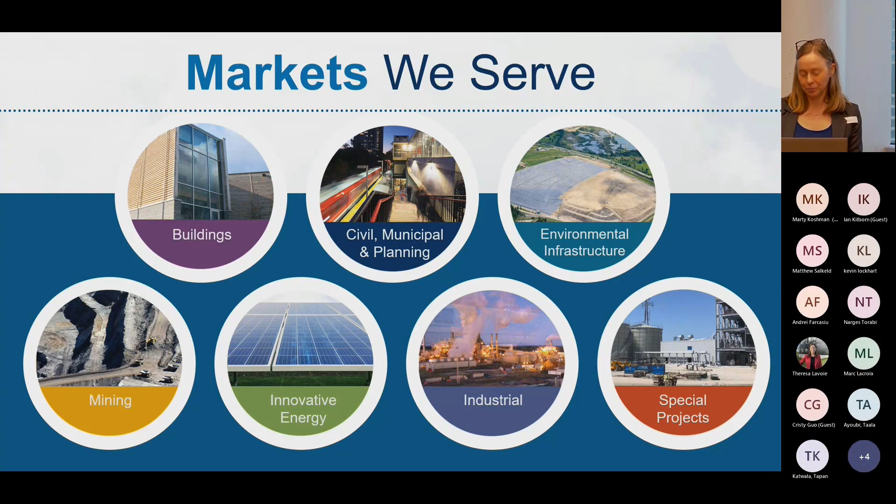We also think of ourselves in terms of the disciplines here at the company. There are 5 engineering disciplines: civil, electrical, mechanical, environmental, and structural, as well as planning and architecture. We can tackle basically any project that comes in our door, and we like to work on complicated multidisciplinary projects along the way.

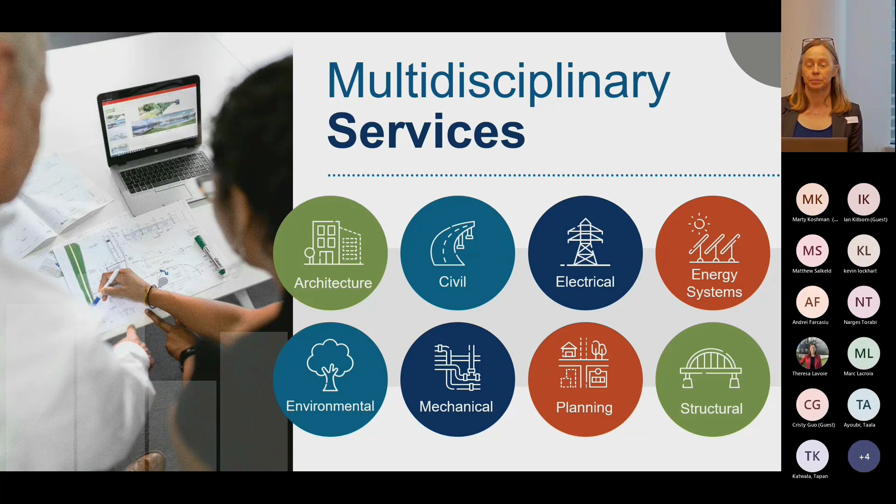We care very much about the planet that we live on, the environment, and the people that we work with. So we have a focus on Indigenous relationships, with long-standing interaction with a number of First Nations, supporting their buildings and infrastructure. Sustainability is important to the company and a growing part of our delivery model, and social responsibility has been a long-term part of the company.

So two slides here just to set the context. I think this isn't all that new to everybody here in the room. I'm so pleased, and thank you everyone for coming and joining in to help build this community of people that understand energy and carbon reductions and how we can all work together to get to where we're headed.

As you know, the history of the world is population growth and demand growth for energy, and that's typically seen a growth in GHGs over time—this is the highest line on the chart. Building codes, more efficient products, and even LEED-type building design standards have brought that curve down, but it's still been seeing an increase in GHG emissions over time.

But we know that we need to get to significant carbon reductions over time. There are different paths that can be taken from where we are to where we need to get to, and different targets down the road, marked by some of those X's. Our job today, in terms of energy and carbon in buildings, is to accelerate within the building sector, making sure there's a downward path so that by 2030 new buildings are primarily net zero carbon, and by 2050 the entire building stock has a very low carbon footprint.

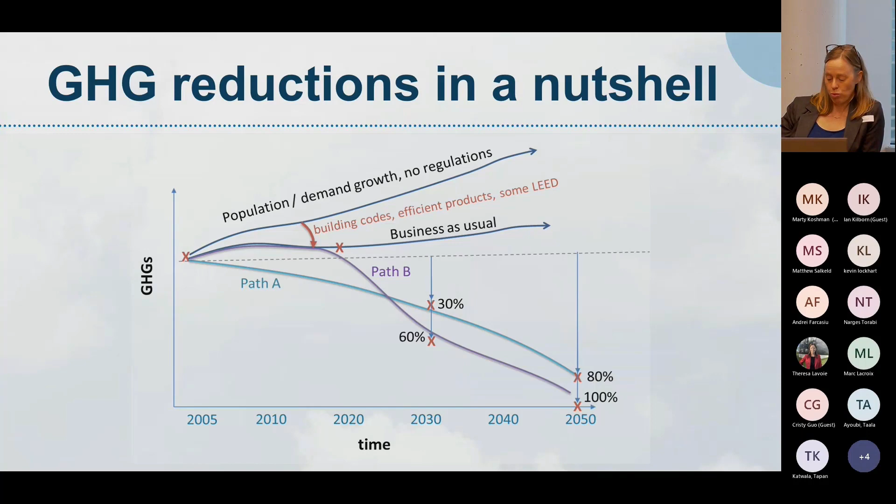I borrowed this from the City of Ottawa. Some of us on our team have had a long collaborative effort working with the city on the Energy Evolution Program, and we're pleased to see where they've come to. This is their analysis of where all the GHG savings and reductions need to occur within the City of Ottawa.

To hit net zero carbon by 2050. Our topic today is the bar along the bottom, the dark green of new buildings primarily. The building standard will primarily tackle that tranche of all the work we need to do. J.L. Richards works across most of these tranches, and our energy team is interacting with all of our disciplines and markets to work towards reducing carbon in all of those sectors.

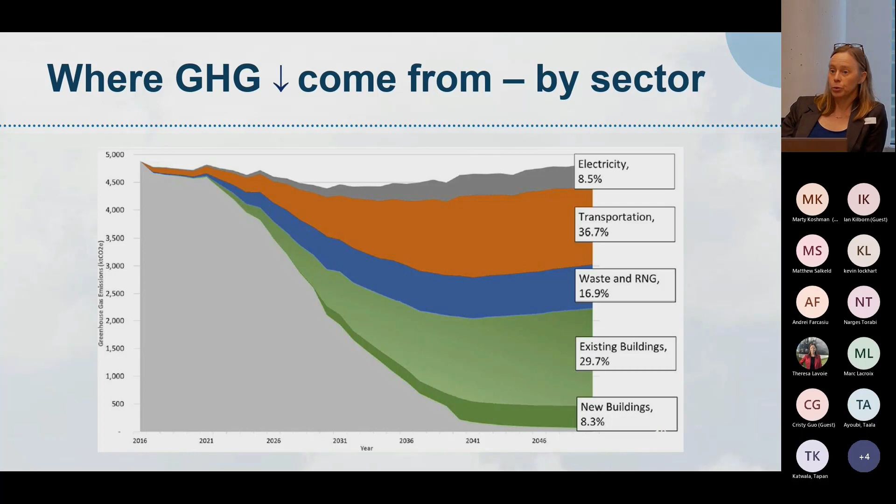But today's topic, as you know, is new buildings. So I'll leave it there, hopefully having set the stage for understanding what some of these design standards can do, how they work, and how they're driving us forward. Thank you so very much.

Okay, quick transition. So up on the screen here, I've got a few of the big name standards that I wanted to do a brief overview of today. I've grouped them into four main categories.

You have the model codes, which are national level codes referenced by many other codes or built off of. The regulatory codes are put in place by authorities having jurisdiction and are enforced through legislation or contract requirements, such as the City of Ottawa's new high performance development standard that's coming out. There are also design standards, which are more of the green building standards - voluntary standards typically pursued to showcase high performance buildings. And a little separate from all of that are the operating standards, which focus less on the design of a building and more on how a building is actually operating when it's up and running.

There are many other standards I could go on about. As I said, this could be a two-week seminar or conference, but I wanted to focus on these main ones today.

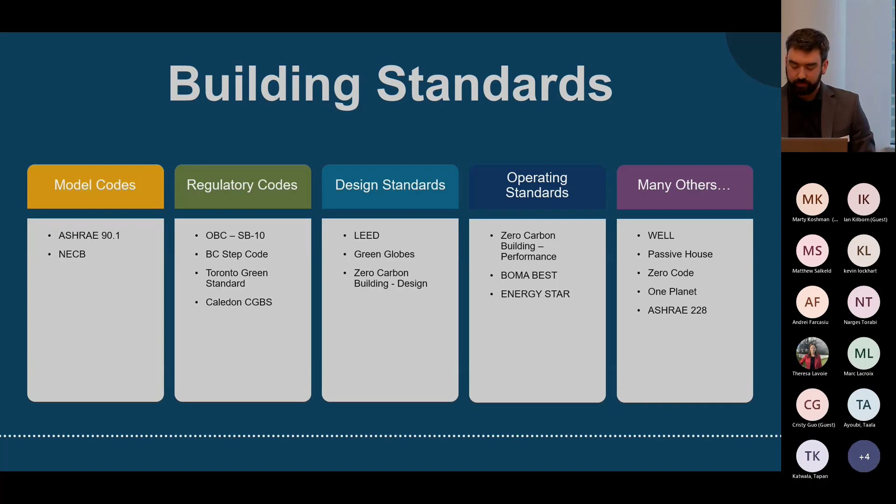So, the baseline reference models - these two are typically set to give a baseline that's compared against. NECB and ASHRAE 90.1 are often used for these baselines, and many funding programs and grants require their use as examples to build off of - for instance, you need to be 25% better than ASHRAE 90.1 or NECB.

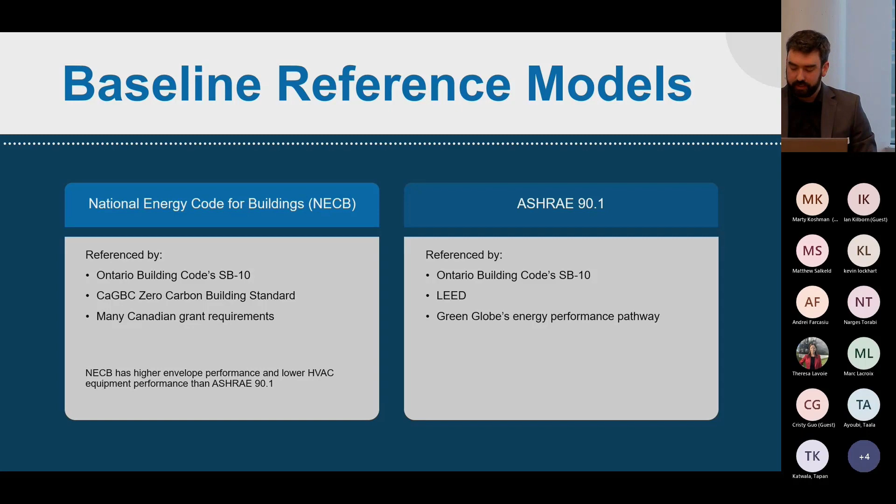ASHRAE 90.1 is probably the grandfather, or grandparent, of energy standards. It was probably the first comprehensive energy standard for commercial buildings, and it's commonly referenced by many other standards. This is the one that is most up to date and revised throughout the years. A lot of new standards will borrow aspects from ASHRAE 90.1, or just point to it directly when setting their own energy targets.

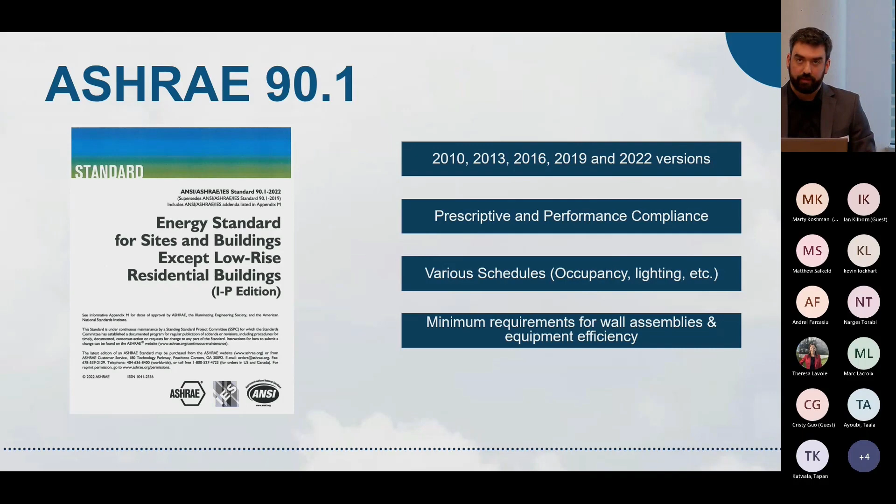There are prescriptive and performance compliance paths throughout it. The performance path has many of the schedules used in energy models for different standards, including compliance with this one. The prescriptive path has set a lot of the standards and efficiency requirements for many pieces of equipment and assemblies throughout the years.

NECB, the National Energy Code for Buildings, is the Canadian equivalent that was built off of and is structured very similarly to the ASHRAE 90.1 standard. It again has a prescriptive trade-off and performance compliance method, and many of the parameters in a performance-based model have to be identical so you really do get an apples-to-apples comparison against that baseline.

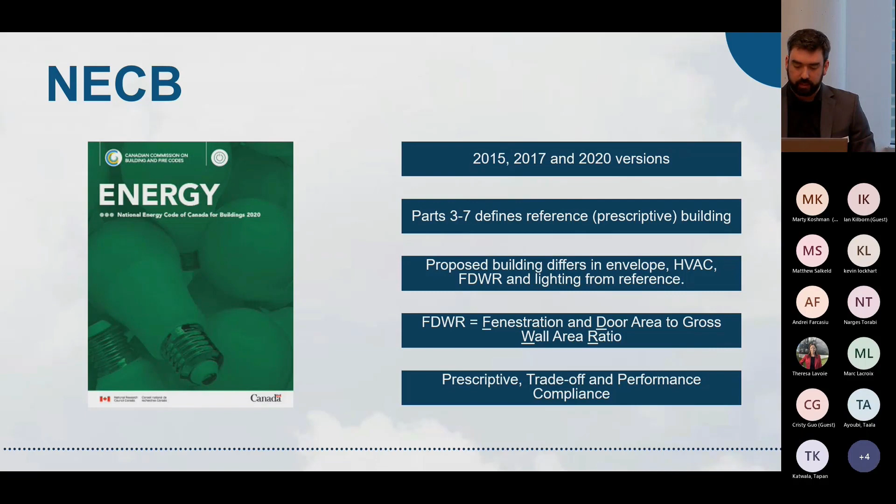The Ontario Building Code SB 10 - I'm sure a lot of people are very familiar with this requirement, and I know it's a headache for a lot of architects out there when they can't have their building full of windows because it doesn't meet certain SB 10 requirements.

But SB 10 is a good example of something that points to ASHRAE 90.1 and NECB for reference models. It again has the prescriptive trade-off and performance compliance paths.

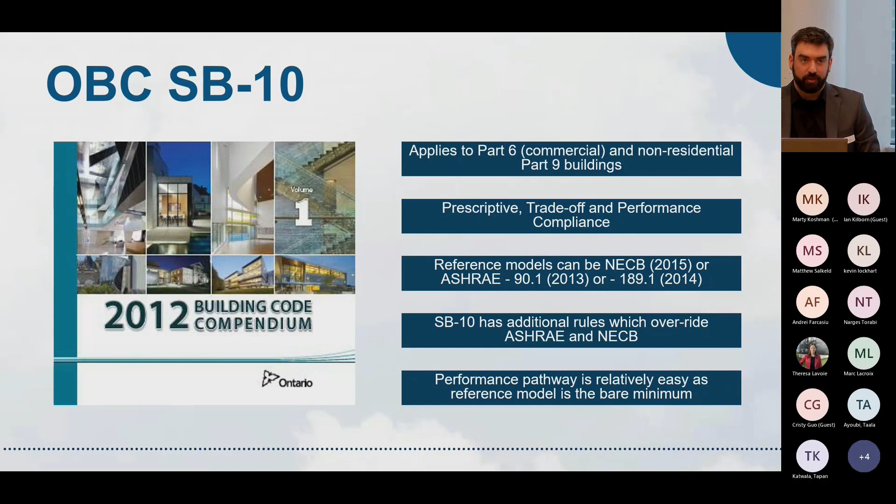I know there are some changes expected to come out, because this is from 2012, very long overdue, and it's kind of an old code. The provincial government has been slow moving to eventually update this - hopefully this year, next year. I don't know if anybody else has a crystal ball that can say when those changes are actually going to come into effect.

I wanted to include the BC Energy Step Code because this is another one that has a long history of pushing the envelope for building design, and it's really made BC a leader in this area. This Energy Step Code became an optional compliance path that municipalities could put in place to require buildings being constructed to be a little more energy efficient.

Different municipalities implemented it in different ways. Some used it as a requirement for building permits or rezoning, while others didn't require it but put in incentives. When BC rolled this out, a lot of municipalities provided training workshops to energy modelers, developers, and constructors on how to meet this standard, to lessen the shock of these new requirements coming into place.

As a result of this standard, BC has become the leading edge for energy modeling requirements, creating guidelines for air tightness testing and thermal bridging calculations that a lot of other energy codes throughout the country now point to as guidelines and references.

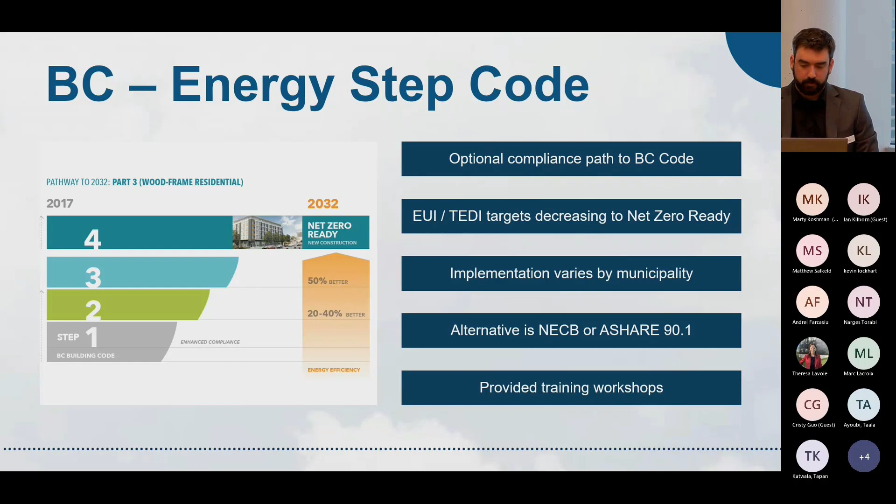Coming back to Ontario, the City of Toronto's Toronto Green Standard has been around since about 2018, setting the idea that all new buildings in Toronto should be net zero carbon by 2030. The most recent update, version 4, came into effect last year. Since 2018, there have been 4 different tiers of targets for the 5 most common building archetypes. Every 4 years, what used to be the tier 1 requirements, or what used to be tier 2, now becomes tier 1, getting more stringent each year as they approach 2030, hoping all new buildings will be net zero carbon by then.

It has additional prescriptive requirements, such as renewable energy, resiliency, water conservation, and stormwater runoff. This standard has been the inspiration for a lot of other municipalities to create their own standards based off of Toronto, tweaking it for their own unique purposes.

An example we worked on was with the town of Caledon, where they came up with their own corporate green building standard. I'm using this not to showcase how great the town of Caledon is, but as an example that many small towns, universities, or other organizations with a big building stock have started to create their own green building standard to apply to any new construction. It becomes more of a blanket requirement they can put in place, so they don't have to constantly put all these requirements on any new RFP and design. They have a standard that's been developed and tested and can be pointed to for any of their own upcoming buildings, and we're seeing this come up more and more.

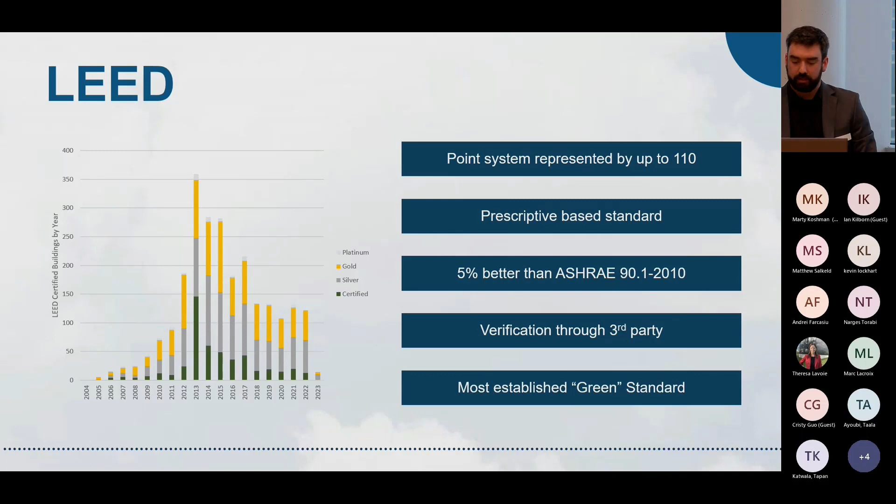Green Globes is kind of an alternative to LEED that has shown up. It's not as popular as the LEED standard, but we've started to see it show up more often from some federal agencies and other universities that are picking this over LEED as their requirement. It's similar to LEED with a points-based system—Green Globes has a 1,000 point-based system. The latest version of Green Globes rewards reductions in embodied carbon, which is starting to be another aspect added into a lot of these standards, getting focused not just on operational carbon emissions, but the embodied carbon that went into the construction of the building.

Moving out of LEED came the Zero Carbon Building Standard, developed by the Canada Green Building Council, with version 3 just released last year. What's different from this standard compared to LEED and Green Globes is there's only one certification level. It's either a zero carbon building or it is not—there's no gold, platinum, or other levels. There's a set of requirements to meet the standard, and you either get the certification or you don't.

What's also different from a lot of design standards is this is broken up into a design standard that can be issued to a project at the issued-for-construction stage of the drawing package, and a performance standard that's issued after the building has been up and running. It really ties in not just how buildings are designed, but how they operate over a year.

The latest version of the design standard has included requirements for reduced embodied carbon. In previous versions you got credit for reducing embodied carbon, but it wasn't mandatory. This standard is commonly referenced by many federal funding agencies when they're calling out a net zero building or requiring new construction to meet net zero standards. When you read the fine print, they're eventually pointing back to this standard to get their funding levels.

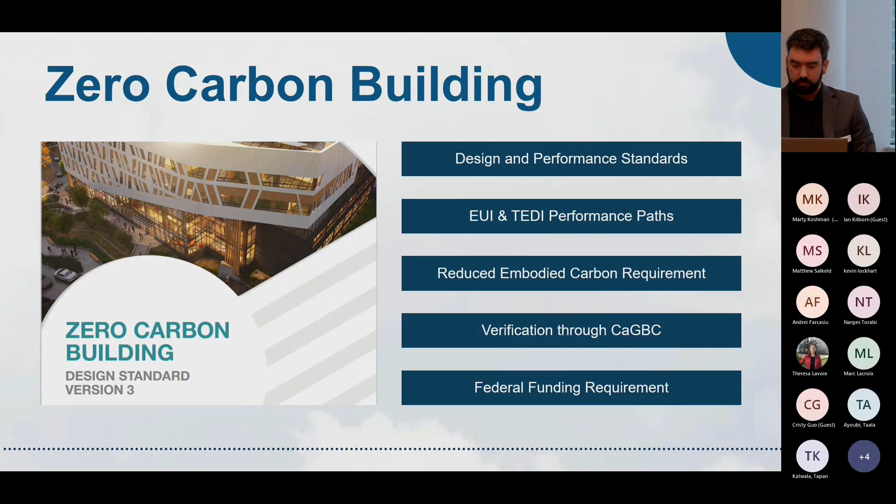Moving off the design side and into the operation side, BOMA BEST has probably been the most recognized certification that building operators can get to show how great their building is running. Many of us were at the presentation yesterday where they talked about BOMA BEST 4, which just came out. This standard focuses more on building operation rather than design. It has 5 different certification levels, and one great change is that the lowest level, which used to be called BOMA BEST Certified, is now BOMA BEST Baseline. It really represents that you haven't achieved anything yet, but you're setting a baseline for how to improve your building.

This standard focuses on areas besides just energy—it also includes water, waste reduction, emissions and effluents, indoor environment, and environmental management. The certification process is largely through their online questionnaire, with some assessments that have to be done and uploaded as part of it. It's really the established standard for building operators, and there are a lot of commercial office buildings around town proud to have that little BOMA BEST tombstone sitting in their lobby.

On the operations side, there's also the Energy Star standard. A lot of people might recognize that symbol from their dryer or fridge, but Energy Star also does certifications for buildings. This system was originally developed in the US, and Natural Resources Canada brought it over and adopted it in Canada. It focuses primarily on building energy consumption.

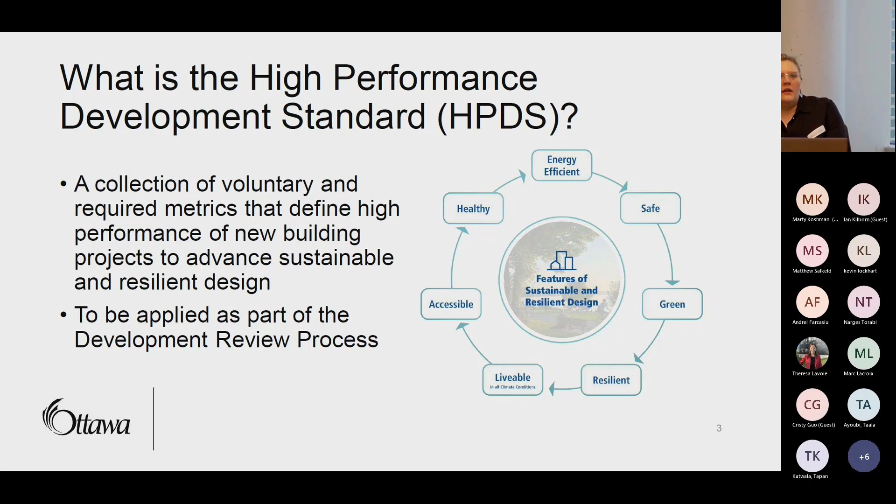This all started back in 2015 when the city began its renewable energy strategy, later renamed Energy Evolution, which aims to set the path for how we're going to respond to our climate goals and targets. Then in 2019, City of Ottawa Council declared a climate emergency, which helped put more pressure to move these big projects forward out of Energy Evolution. Also in 2019, we brought forward our climate change master plan with new greenhouse gas emission reduction targets for both the city as a corporation and the city more broadly, the whole community targets set.

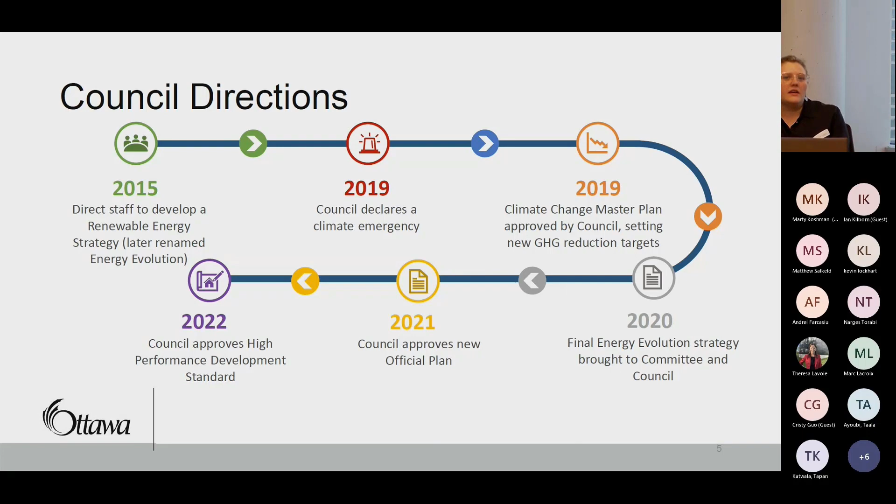Then in 2022, we brought forward our high performance development standard, which council approved. Just earlier this week, we brought forward our report to committee on the new timeline for implementation for the high performance development standard. That's gone through and been approved by committee, and it goes to council on May 10th. That gives you an overview of the history of things.

So the greenhouse gas emission reduction targets for the community: we're essentially working towards 100% reduction from our 2012 baseline by 2050, with getting almost all the way there by 2040. It's easy to focus on that 100% by 2050 number, but 96% by 2040 is a very difficult target to get to as well. On the corporate side, we're advancing a little bit faster - they need to have 100% greenhouse gas emission reductions by 2040.

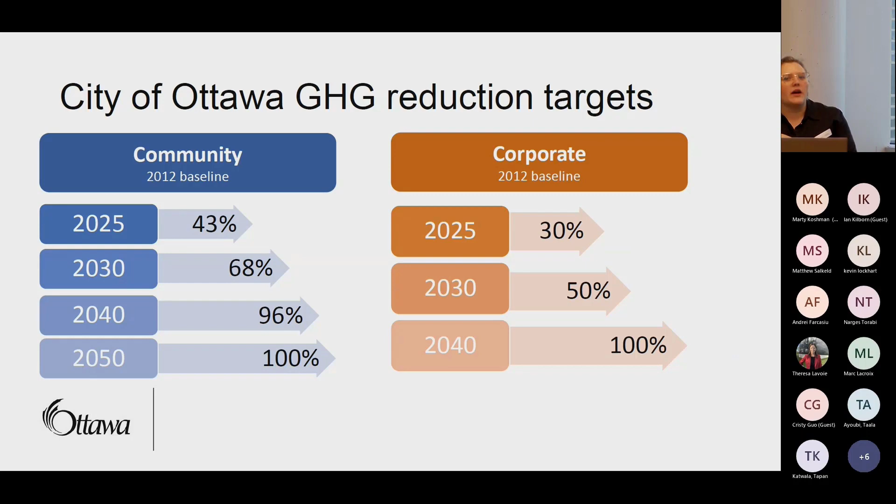This was all informed by our Energy Evolution model, which essentially modeled out how we would be performing from a greenhouse gas emission perspective, including growth based on business as planned, shown as the top line of this graph. Each sector identifies what portion of the reductions we would expect to see. Today we're focusing on new buildings, which make up about 8% of our emission reductions.

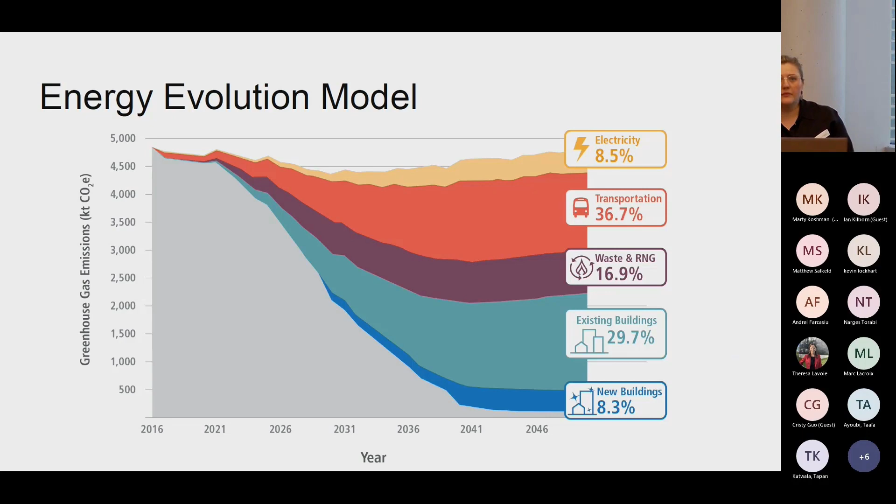The City of Ottawa has also, as part of our climate change master plan, done climate projections work, which we partnered with the National Capital Commission on. This chart is showing the high carbon emission scenario. We modeled out three different scenarios - low, medium, high - in terms of carbon emissions, and have very detailed results on the implications. This is a snapshot of it; I can send you the link to the complete package.

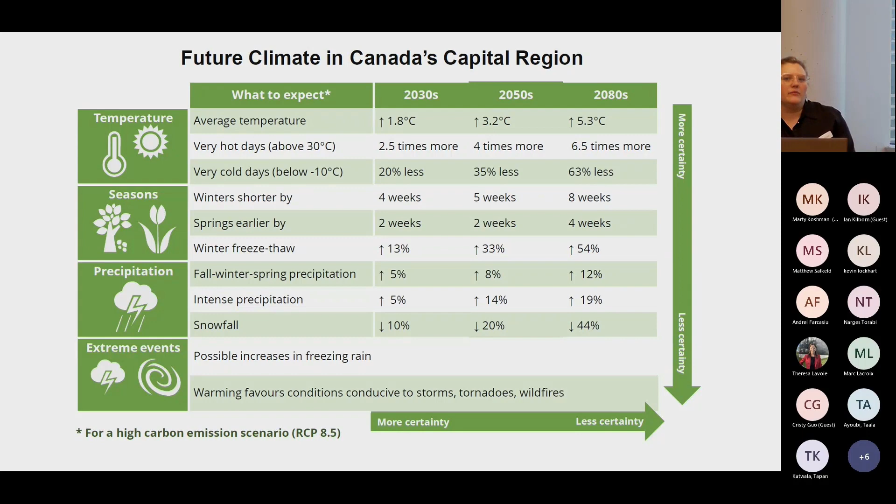It includes future cooling degree days, future heating degree days, all sorts of details on future precipitation levels and those kinds of things. Some pretty stark numbers overall. The general synopsis is it's getting warmer, wetter, and wilder - significantly more very hot days, significantly more extreme weather events, and significantly more precipitation in certain parts of the year.

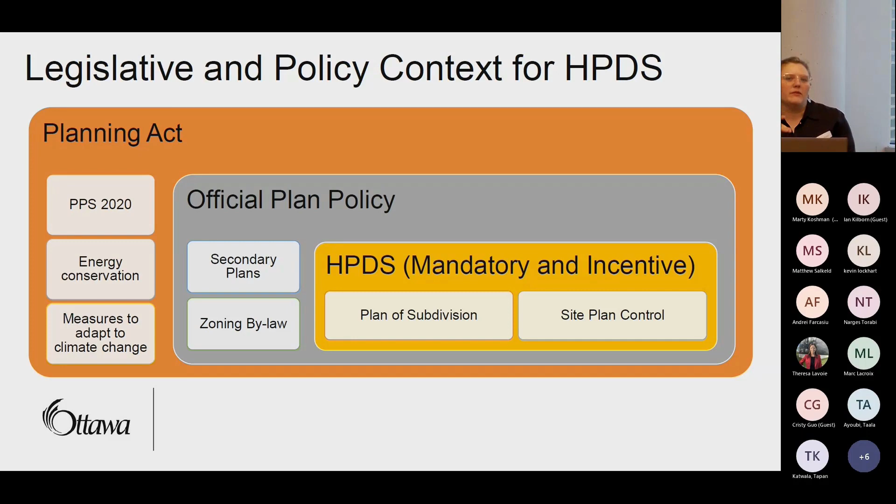Coming back to the high performance development standard, the policy context for that - we're given our authority for having this standard from the Planning Act, which then directs us to have policy framework within our official plan. And then that sets the pathway for having our mandatory standard, which is implemented through our plan of subdivision and our site plan control processes.

So the high performance development standard does not apply to projects that are only required to do a construction building permit - it only applies if you're going through the planning processes. So tier 1 is mandatory for projects that are going through site plan control and plan of subdivision.

Tier 2 is completely voluntary, and we've been directed to look at an incentive program for that, which we'll be starting engagement on later this year, and then we're putting back to committee and council on options for it in 2024. And then the last piece is the city's green building policy, which we've been directed to look at updating to align with tier 2 of the high performance development standard, which addresses the city's corporate new construction projects.

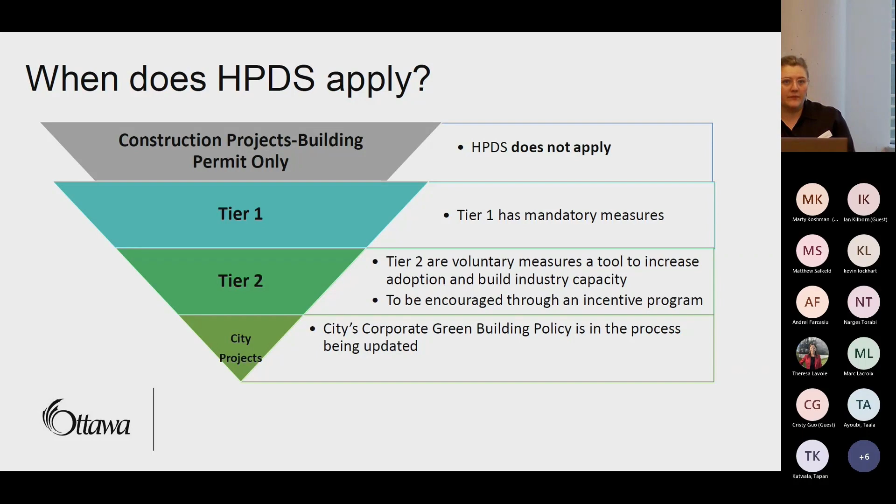So what we've proposed to committee and council in terms of our rollout and monitoring - this is up for a vote, as I mentioned earlier, at council on May 10th. So it would be coming into effect on July 1st of this year. And then the review and approval is through our planning services process. And then full compliance is required for the standard, although we do have some deviation pathways if there's sufficient justification provided or an alternative pathway proposed.

In particular, I'll note the energy efficiency metrics. While we're going to require reporting on them starting July 1st, they're not mandatory until January 2024. So it's sort of a report-only period for 6 months to get familiar with the process of how it will get implemented and then come into effect in January.

And part of the reason for that lag is also the province has indicated a potential update to the Ontario Building Code, which may relate to green development standards, and we want to make sure we're prepared for what happens there, and that could be coming out as early as this summer.

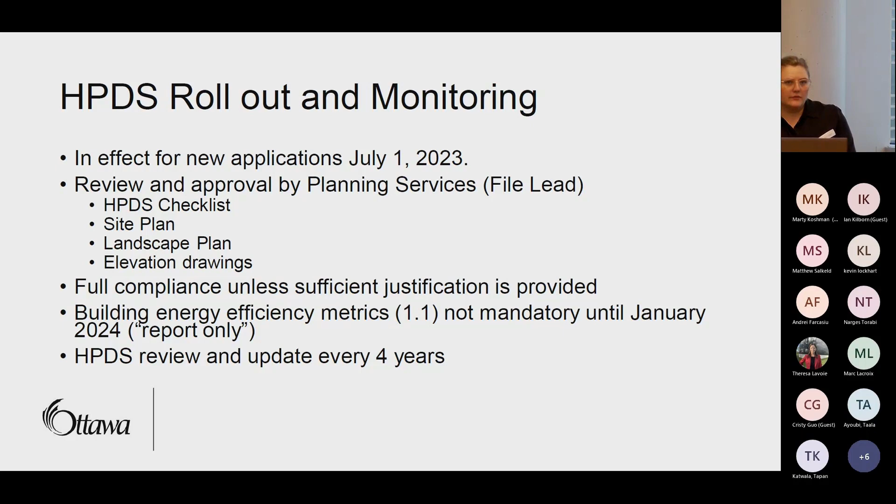And then we've been directed to review and update the high performance development standard every 4 years. Similar to what was mentioned with what Toronto does, the model we're envisioning is that the tier 2 energy performance targets that are part of our first version would become the future version's tier 1. That will be subject to council review and approval in 2025 and come into effect in 2026.

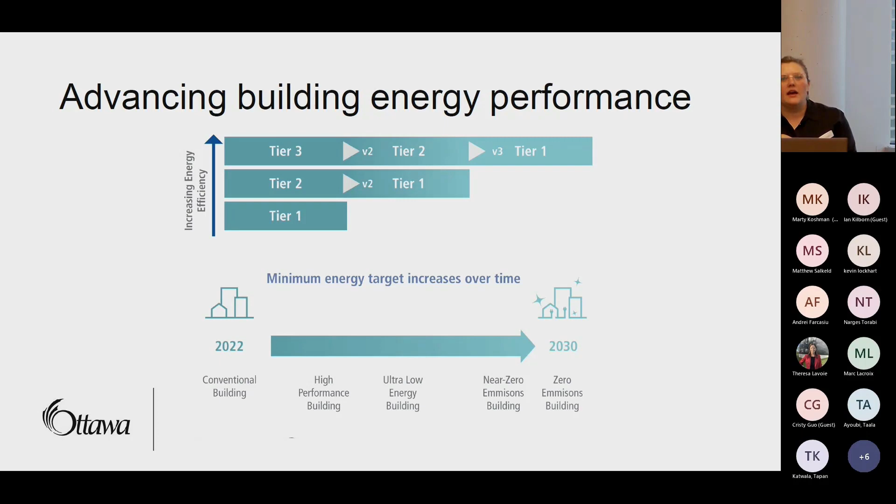Some of these pieces refer back to other requirements, such as the mobility pieces referring to the zoning bylaw, which is going through engagement for a full update currently. I believe the next version of the zoning bylaw will come into effect in 2024-2025, and could have implications for electric vehicle parking requirements and increases in bike storage and access.

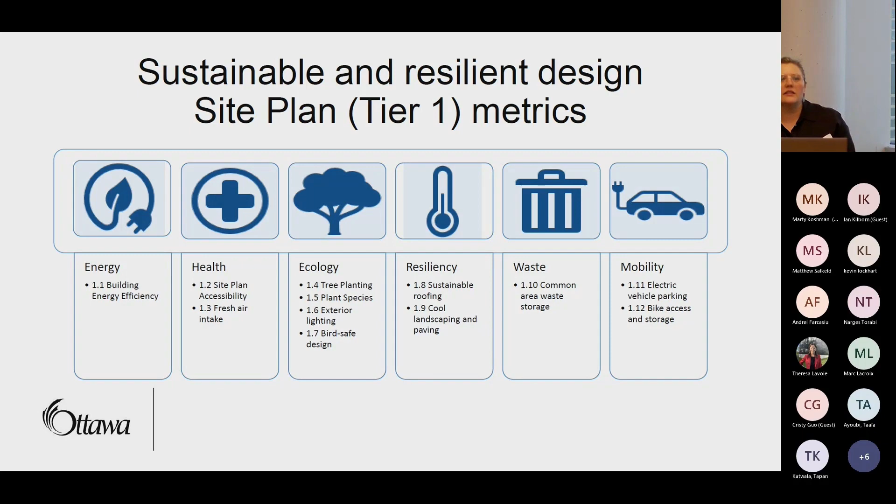So I'll focus today on the energy piece, but this gives you the big picture of what we're covering. For a plan of subdivision, we only have 3 metrics: the community energy plan, and then 2 requirements related to ecology.

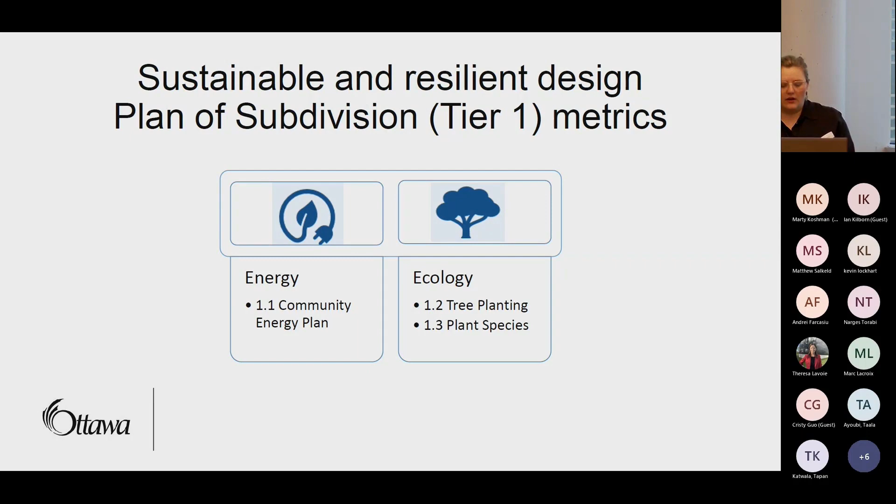So for site plan, for building energy efficiency, the objective is - through exterior measures and early design decisions - to reduce the greenhouse gas emissions associated with operations of new buildings.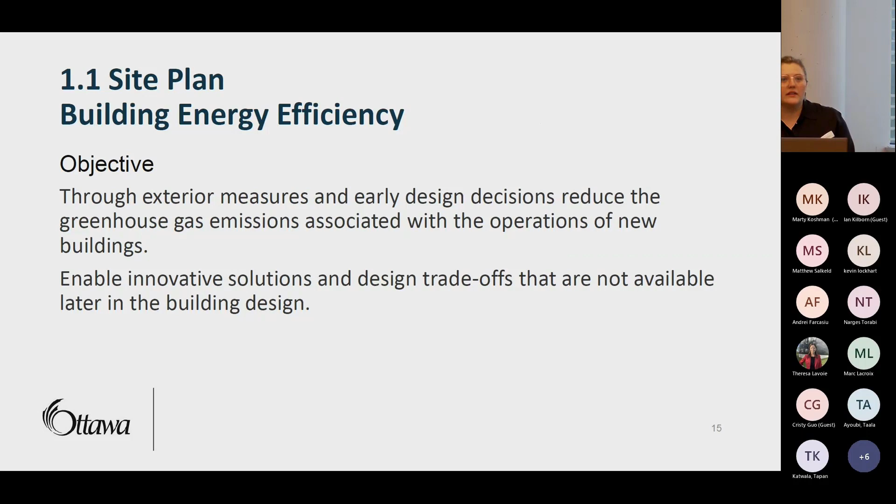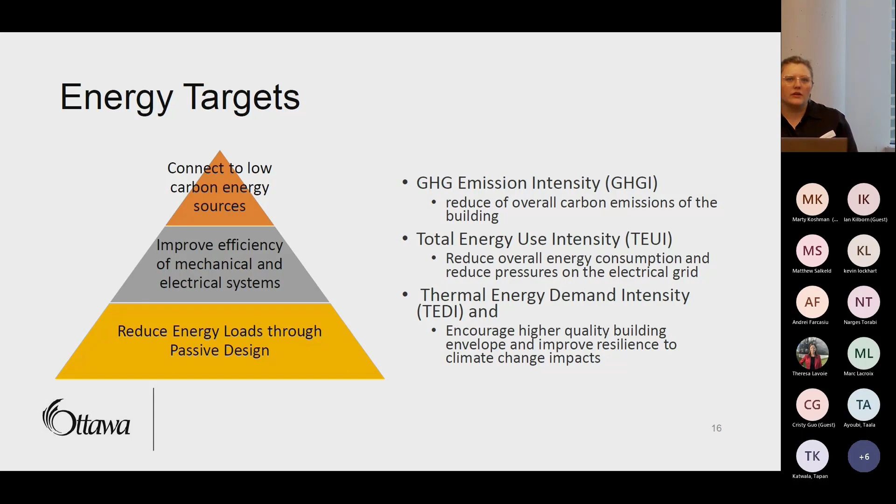The energy targets - we have a few different pathways for energy targets, but the one we're pushing for and encouraging the most is this intensity pathway. The principle of it is reduce your energy loads through passive design first, and that's measured through the thermal energy demand intensity. The next step is improve the efficiency overall, measured primarily through the total energy use intensity. And then the last piece is connecting to low carbon energy sources, measured through the greenhouse gas emission intensity target.

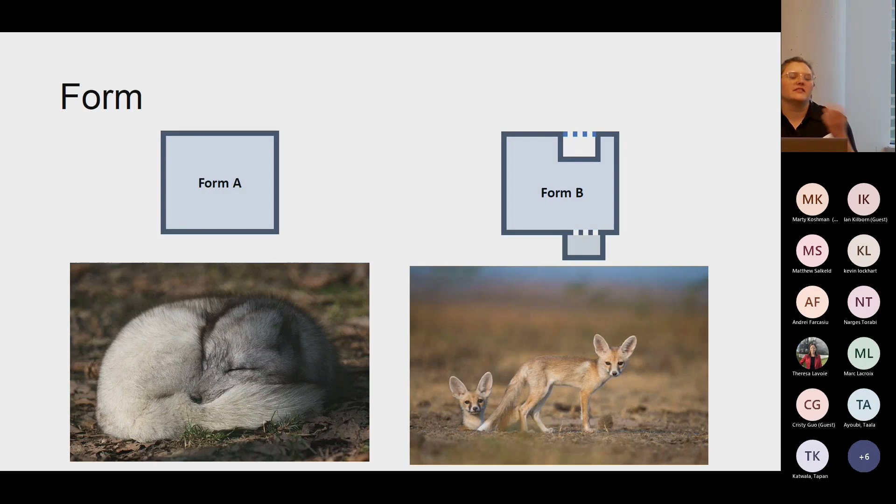I'll go through briefly how we think these pieces factor into the site plan review process. I'm sure with energy experts in the room this is all old news, but the first thing that gets set at site plan is the form of the building. Going back to the natural world, it's very easy to envision which form, within these two options, is going to be the more thermally efficient design.

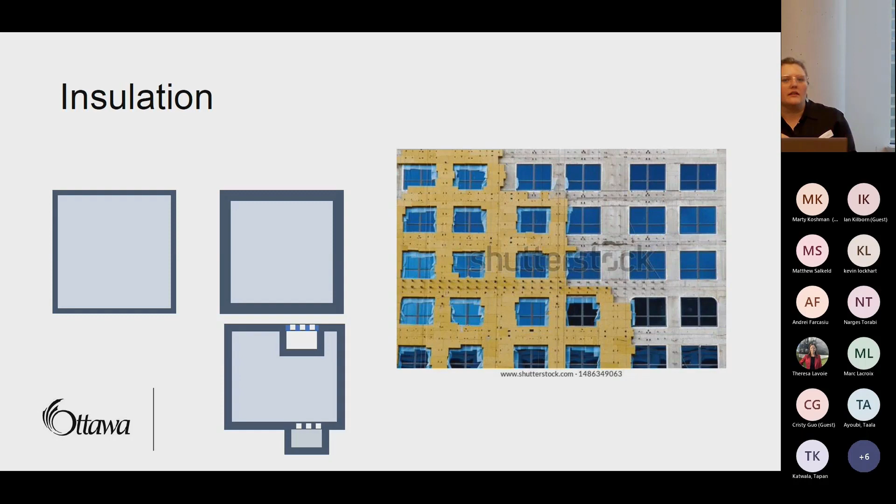The next piece is insulation, which has implications at that early site plan stage for where you want to place the exterior line of your building, how that relates to zoning requirements, and how that might impact usable floor space. So those decisions, although you might not have all the details of the wall assemblies at this stage, can still factor into how the site plan is designed.

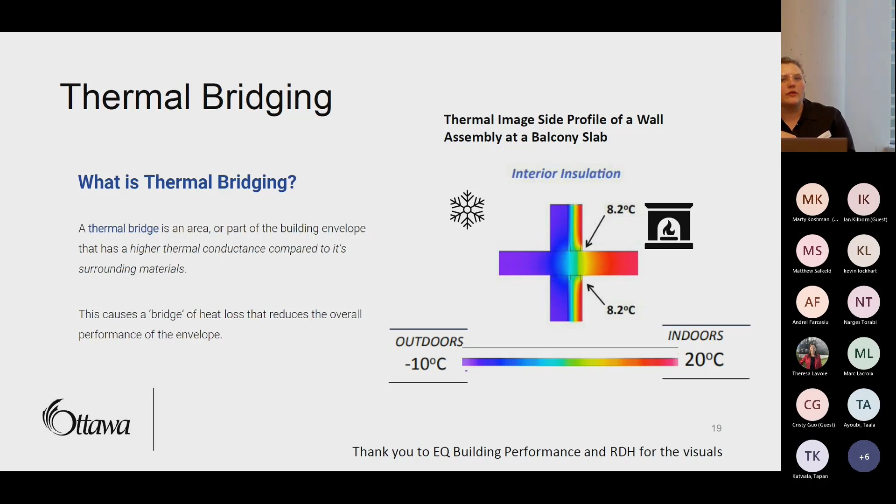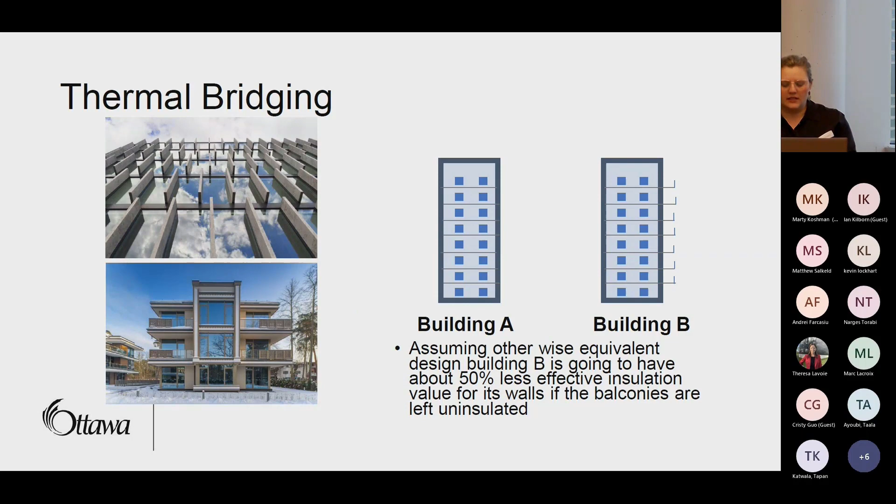Thermal bridging, in particular, the modeling requirements we have follow what the Toronto Green Standard uses. We're using the same modeling programs to be consistent and minimize having to learn new programs. Thermal bridging has been given a bit of a gimme in other modeling approaches, with not all elements counted, but in the one we're using, the same as the Toronto Green Standard, more thermal bridging elements are factored into the protocol. That might have implications for how we design buildings, and whether there's full balconies for every unit or just some.

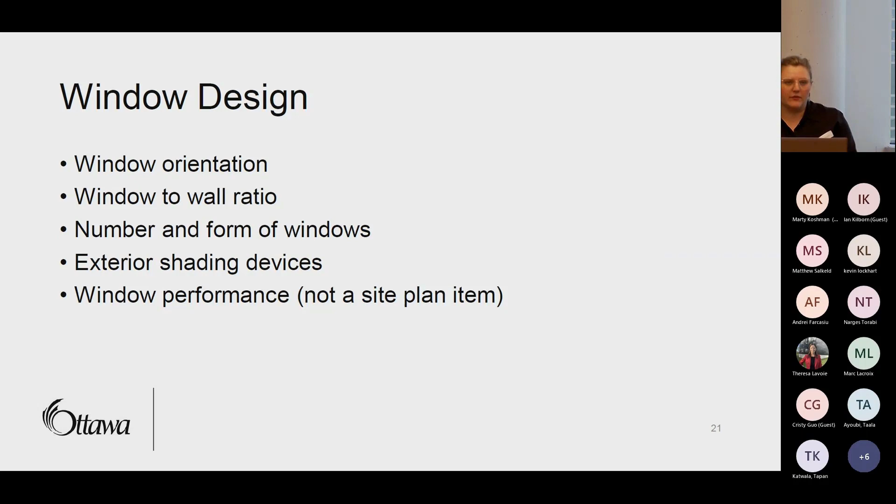The next piece is window design. The targets, which I'll get into in a minute, are pretty strict, and it's going to inform what type of windows, how many of them, and what form they take in terms of the performance of the building. Those will be big decisions for meeting the standards.

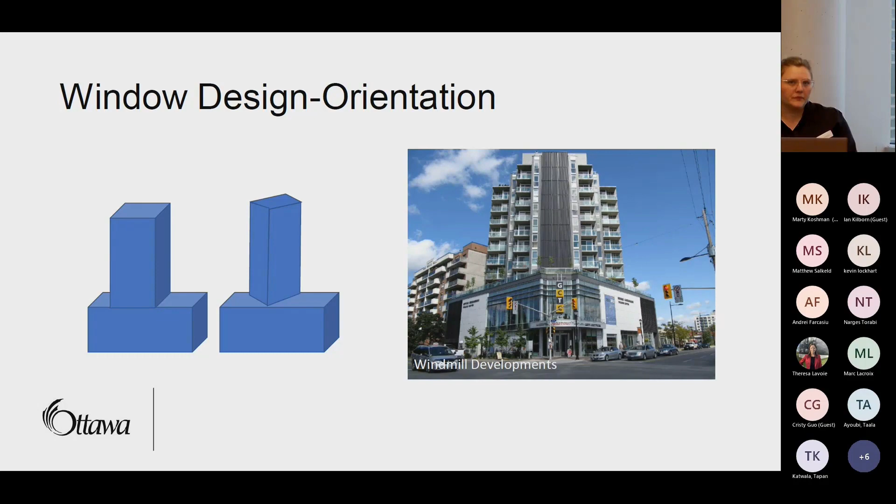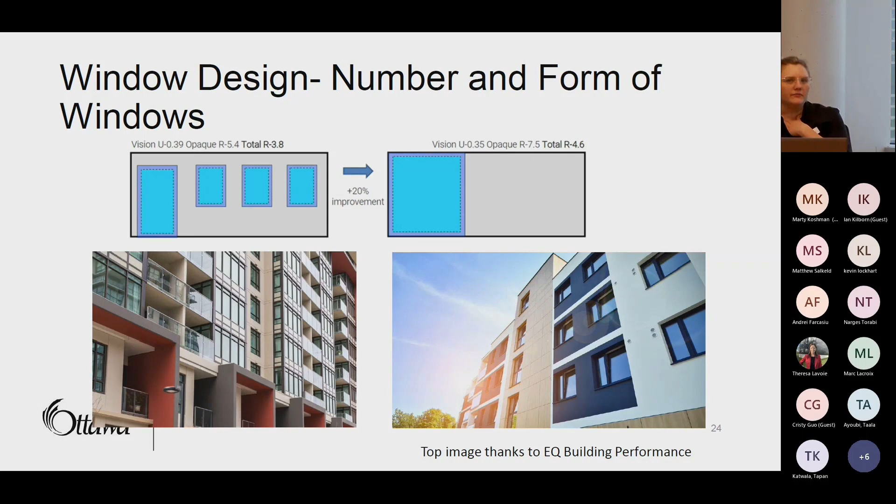Exterior shading devices are another window design feature that we factored in.

The next main principle is airtight construction, and decisions made at the site plan stage in terms of architectural articulation and embellishments will all have implications for airtight construction. That's not to say you can't have those things, it's just that as you're thinking about the design, they're going to have implications.

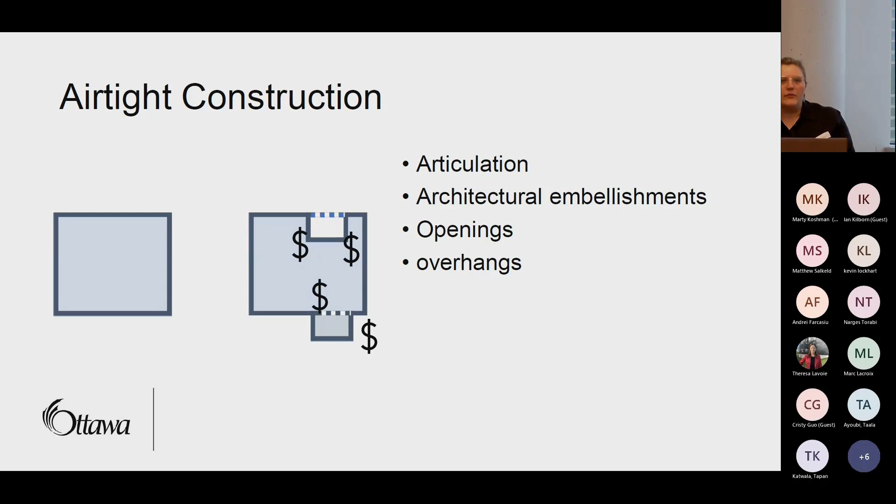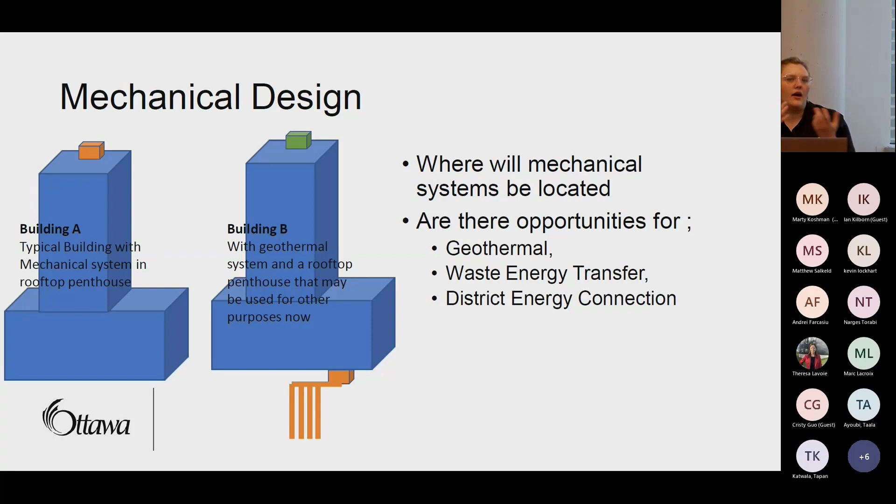And then the last piece, at the site plan stage you won't know your complete mechanical design, but there are certain decisions that should start being considered at that early stage in order to inform how the building might be able to achieve the energy targets.

Just quickly, on building energy efficiency: there are some projects exempt from the energy efficiency requirement. Projects below the HPDS development threshold, which aligns with complex applications, are exempt. For residential projects, that's projects under 14 units. I don't have in my notes the commercial building size threshold, but most larger projects would be over that complex application size threshold. Buildings not subject to energy requirements under the Ontario Building Code, such as temporary use buildings or farm buildings, are exempt, as well as projects not subject to site plan control or the high performance development standard.

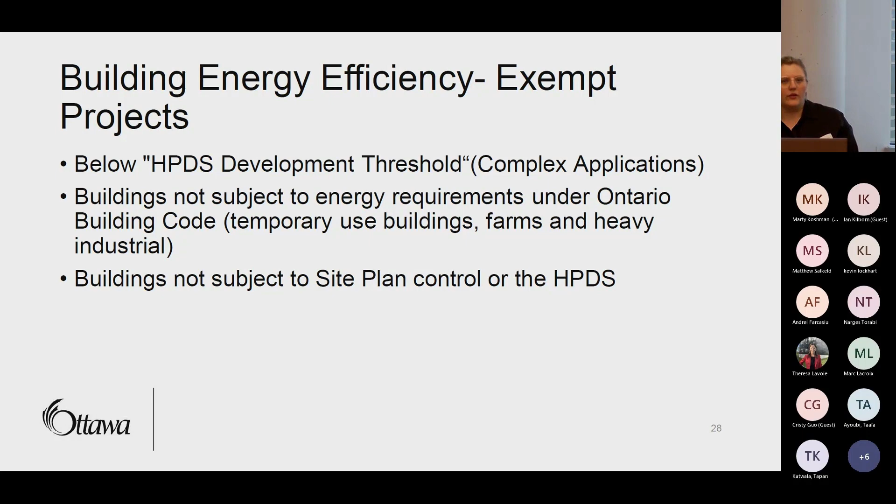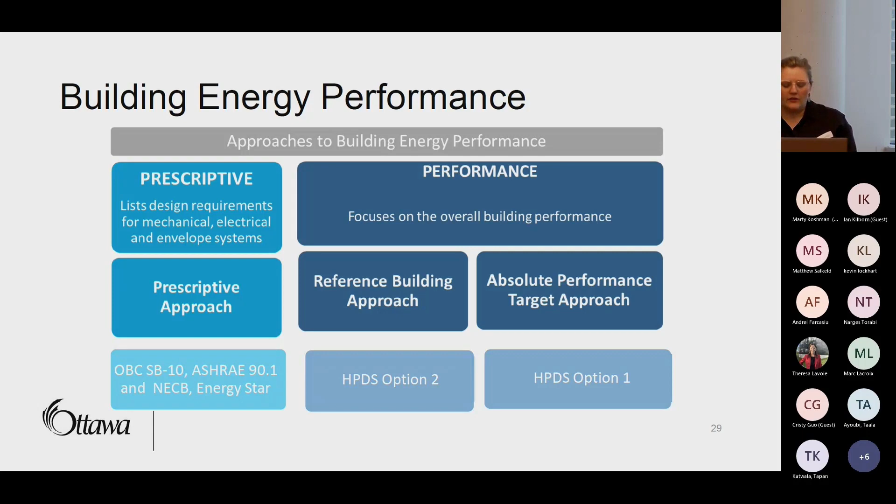This was covered briefly, but we have three pathways for building energy performance: a prescriptive pathway, a reference building approach, and an absolute performance target approach. The prescriptive approach is a certification pathway. The reference building approach is a modeling comparison to a reference building. The absolute performance approach uses energy use intensity targets. These are the three options for demonstrating energy efficiency for the high performance development standard at site plan: energy use intensity targets, a 25% carbon emission reduction compared to a reference building, or commitment to pursue a certification program.

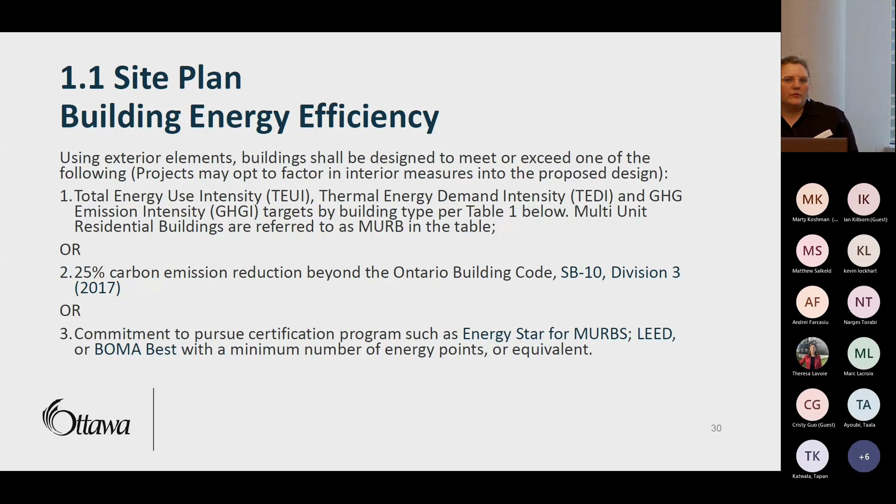In terms of documentation, the applicant is required to provide an energy brief outline at site plan application, and then provide the HPDS checklist outlining the energy performance targets, as well as the energy modeling report as a condition of approval for site plan. So it's not required right at the site plan submission stage, but required before you can clear the conditions and move on to the building permit stage.

We're using a third-party review process for the review of the energy documentation. Our file lead will receive the energy modeling report and then work with a third party to support the review of that report.

May I interrupt? Yeah, in that previous slide there, this is a recent change, is it not - this 2-stage process of an energy brief at the start and then at the end?

That's correct, good flag. Prior to going for a report to council committee this past week, we did some engagement related to the site plan changes coming from the province that have impacted all of our processes. In the consultation, as we started looking at the details of the new timeline requirements and review processes for site plan applications, we concluded through consultation that the approach we should take is to have a brief at the site plan application and then have it as a condition of approval, so we're able to meet the new provincially mandated review timelines for site plan.

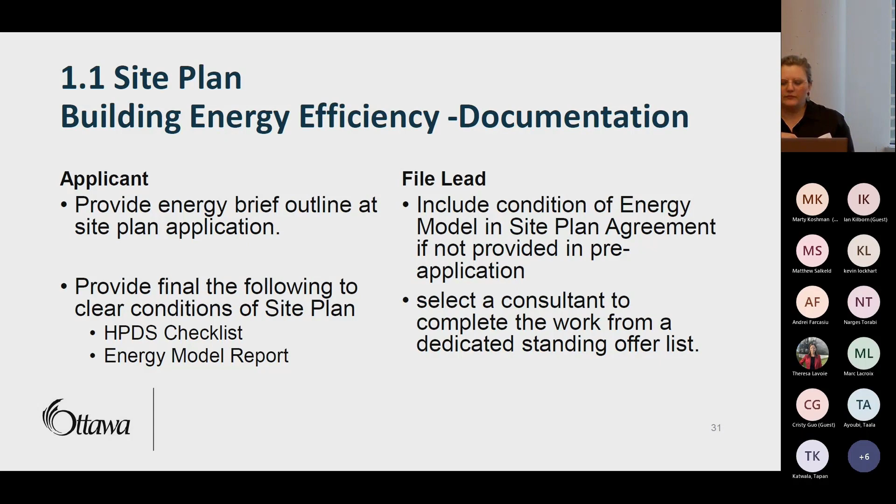Similar to TGS - I don't want to speak for Toronto, but I don't know that they are following that same process. They may still continue to have it be part of their site plan review process.

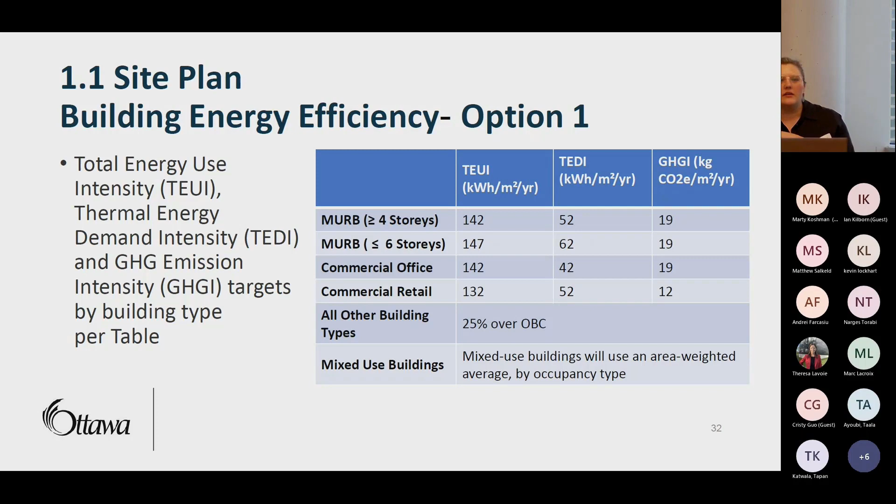So here are the energy use intensity targets. This is just the detailed numbers for multi-unit residential buildings, commercial buildings, commercial retail. Not much more to say on that.

This is what the checklist will look like. It's really just filling out what the projected energy use is, what your floor area is, and then the checklist will calculate your energy use intensities for you. It's built into the checklist - it'll go green if you've met the requirement, and red if you haven't.

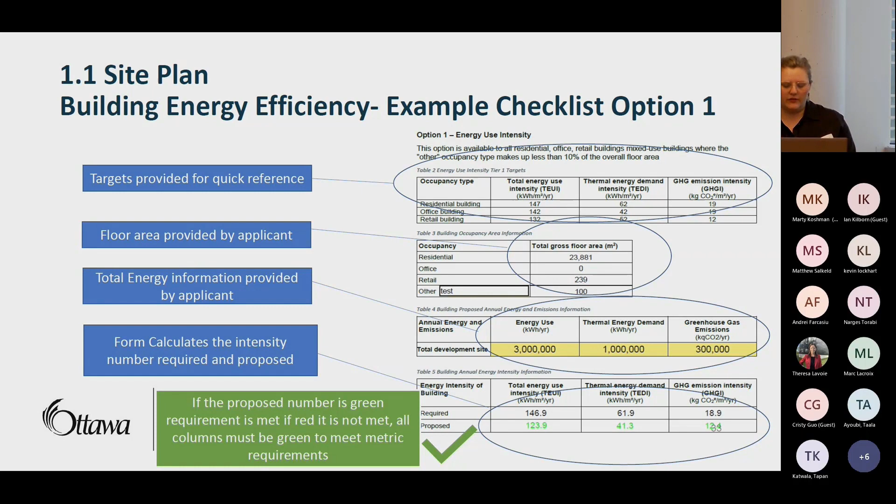For option 2, it's a comparison to the reference building, and it's a carbon emission reduction. What I've been hearing from some energy modelers who've started to dig into this is that this pathway could be quite difficult, because the reference building approach doesn't necessarily give you full benefit for changing mechanical systems, since you're comparing like with like for your mechanical systems.

Yeah, I was going to ask, how is the reference building determined? What is the reference building? It'd be an Ontario building code building, with the exact same dimensions, modeled. Yeah, it's all written out pretty clearly in the NECB.

But the big issue is if you put a heat pump in your proposed building, you also put a heat pump into your reference building. So it becomes very difficult to meet this 25% better carbon emissions because your heat pump is already there - it doesn't use what would be more standard for meeting code on the HVAC side. Unfortunately, it'd be very nice if the reference building used gas, but it's a moving benchmark.

The other thing I've seen criticized more so on the embodied carbon side when looking at reference buildings - I'm curious to hear from the room - is that for embodied carbon, reference buildings don't take into account if you decide to change your building shape or size to fit the same needs, reducing the amount of size you need and not having wasted space. That would actually reduce your embodied carbon, and it would also reduce your operational energy. Is that considered in this or no?

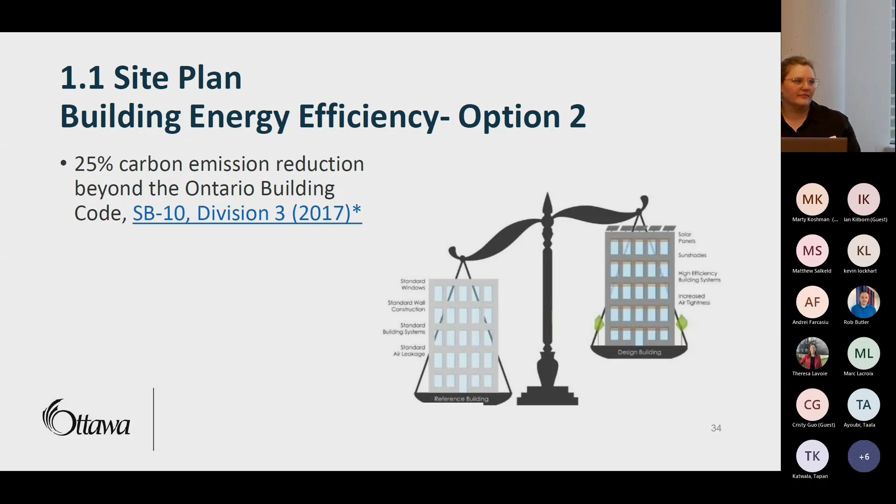The long and short of it is most modelers are going to pick the absolute targets. It's a lot less work and it's a lot easier to hit when the reference building is so difficult to model with. So would it be better to follow a prescriptive path, use the energy model as a tool to see if you're on the right path? Is it better? Well, I'll get to the prescriptive.

The prescriptive path is essentially a certification pathway for the site plan approach. So certainly you could do a certification pathway. These certifications aren't exactly like-for-like in terms of the energy use intensity targets, but the big advantage from the city's perspective to the certification pathway is that there is a measurement and verification aspect to it, whereas the city in the site plan process, once you've submitted your site plan, there's not a lot of recourse if you don't complete and construct as intended.

What software? I would have to refer you to the terms of reference for the software packages. I just saw it, but yeah, I think probably option 1 and option 3 are going to be the most popular for a site plan application, but it may depend a little bit.

Site plan does apply to, or can apply to, both Part 3 and Part 9. So the most popular pathways might vary a little bit depending on if we're talking about more typical commercial or large multi-unit residential, or a smaller kind of wood frame multi-unit residential.

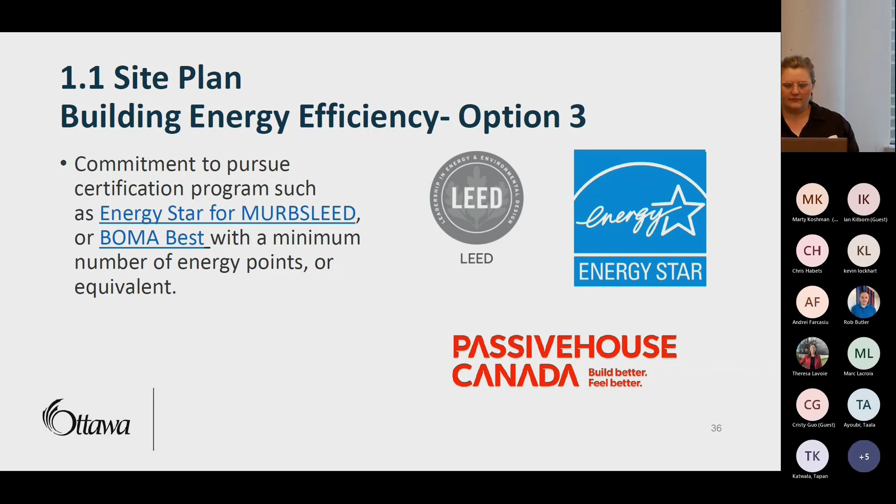So community energy plans, that's... just before we move to that, interject.

So I think overall the regulatory environment is a huge factor in how we can move forward. Absolutely, and it's controlled by a lot of different players with a lot of different authorizations, and no one piece is going to be the full solution. But to see this move forward by the city and to see them be able to advocate to the province are some of the steps, the levers that we need towards our ultimate goals. So I think that's how I read it in a nutshell.

Yeah, totally agree. Yeah, good, it was a good time to pause.

So is there anything more on the site plan before I move to the plan of subdivision stuff? What I'm gathering here is we could submit this energy model with the site plan approval and have that checked off at 30% design, and theoretically not have to look at it again all the way through to building permit. Is that correct? Yeah, once you have an approved energy model, that would be correct, you wouldn't have to look at it again.

It'd be advantageous to a customer to get this in earlier rather than later, both because the model will be simpler, and they won't have to make any changes later to their building if they don't meet their codes. It is theoretically possible that somebody hits this standard but fails the SB10 if they're not using the reference building approach. You could theoretically hit your absolute targets, but if your reference building has a heat pump in it as well, and you have to model for SB10 to the reference building, you could theoretically fail it.

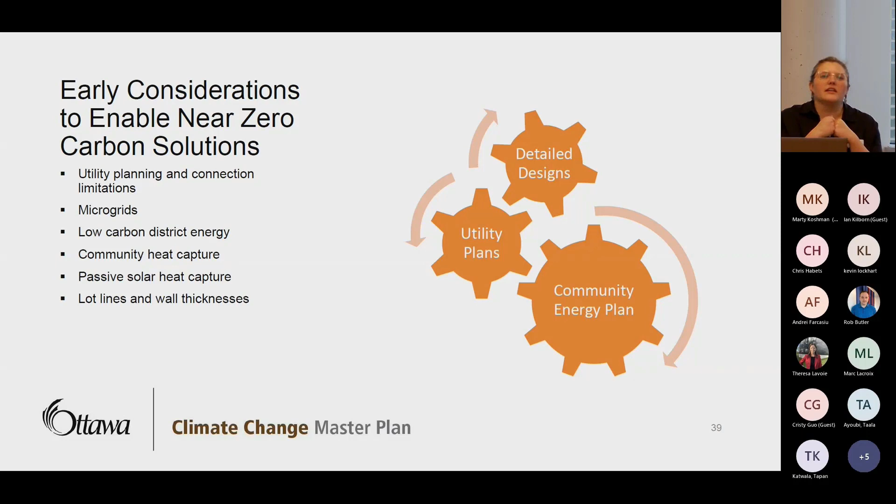So, community energy plans - this is our plan of subdivision requirements. The intention of community energy plans is to start early considerations to enable zero carbon solutions at the community scale, and remove roadblocks that communities might see when lots of buildings want to go to a zero carbon solution. There might be utility or grid constraints if you haven't built those into the design. So when we're building new communities, we're starting to think about that early on. Your community energy plan sets the overall direction, and then it works with your utility plans and detailed building designs to all work together towards that same goal.

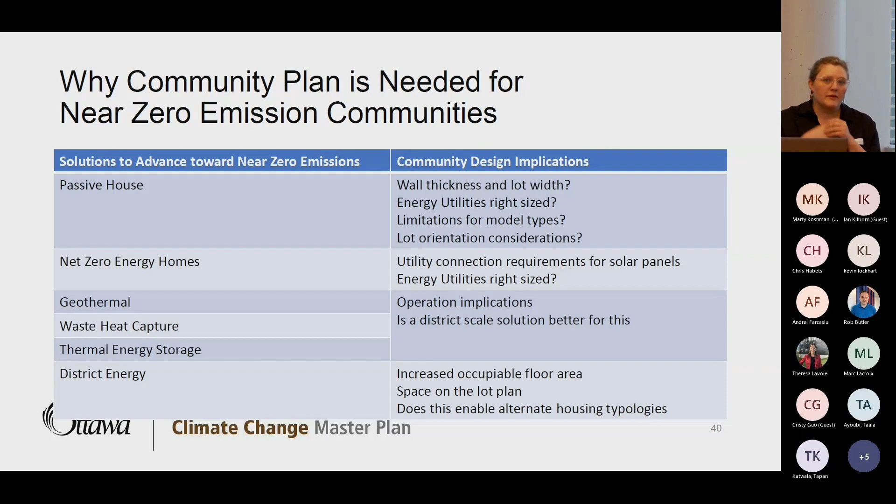Some things that will be important to think about with these near zero emission communities - I'll pull out an example. When we talk about net zero energy homes, if we're going fully electric for a whole subdivision, is the utility connection set up to deal with that kind of building design? At the moment, I don't think most plans of subdivision would be able to go fully electric for all of their homes. They would have to have that early conversation with their hydro provider to make sure that what's getting put in the ground and built out early on is right-sized for their future energy demands.

Is that something you're laying out, like a pathway for? So the requirement is to complete a community energy plan. There's a modeling pathway for the community energy plan, or there's a prescriptive pathway. The modeling pathway isn't going to be very common or popular - I think it'll be mostly popular for those communities that have a vision toward and commitment to net zero, and want to have those conversations with their utility partners and be recognized for having them early. I think most projects will pursue a prescriptive path.

The way we envision it, we've set out the community energy plan requirements - if used effectively, it's essentially a communication tool to start those conversations in an informed way, so that all your utility partners are mutually working together and supporting each other to facilitate that transition. The community energy plan requirements are somewhat less prescriptive because there's so much variability in the types of projects and solutions, as well as ownership structures - you might have a land developer just selling off lots to individual building owners, which adds layers of complexity. So we've left it a bit more loose in terms of implementation because of those unknowns from project to project.

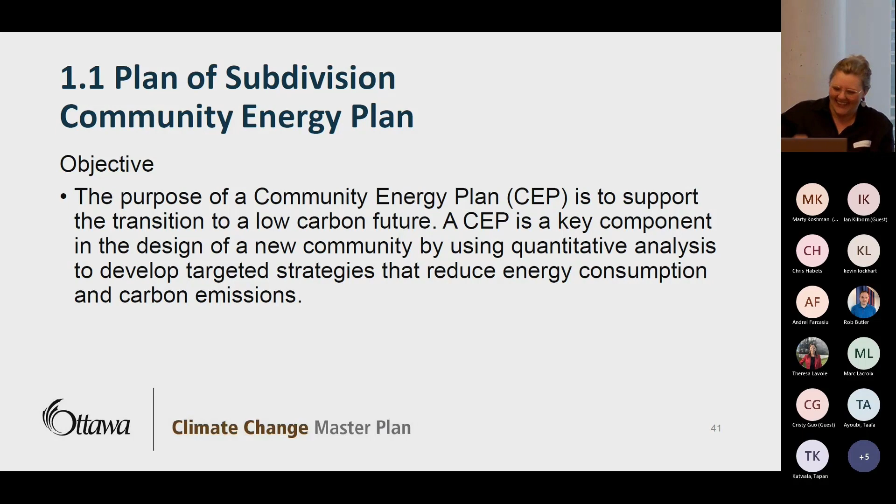In terms of the applicant requirements for plan of subdivision, the first step is to provide a letter outlining the approach to the community energy plan at application, then similar to the site plan process, provide the final community energy plan, either report or brief, I'll get into the differences between the two in a second, to clear the conditions for plan of subdivision. That's part of the checklist. In terms of review, it's a similar approach where we use a third party consultant to support the review.

The way we see this, I'm realizing this slide normally has an animation, but I sent it as a PDF so you can't see it. We see community energy plans as a bit of a nested approach, similar to the nesting of planning. From a municipal level, our municipal energy plan is our energy evolution strategy, similar to our Ottawa official plan, which is how we plan for growth across the city.

At the community energy plan, we have the new community stage, similar to our community design plans or local plans. Nesting one more down, we have a community energy plan or community energy plan brief for the subdivision stage, similar to the actual plan of subdivision. And the last step is the building energy model, which would be similar to your construction plans.

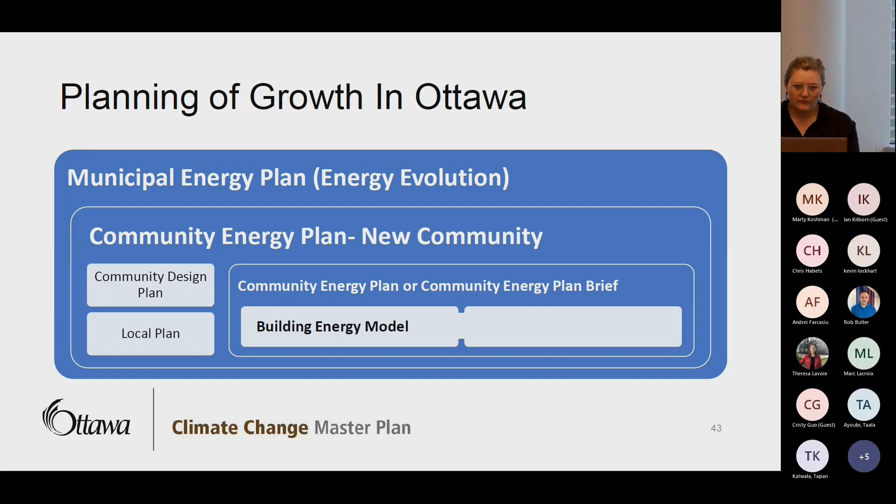So when is a community energy plan required? We have two different requirements: a report or a brief, and this is kind of the decision tree to help inform people as to whether or not they should be producing a report or a brief.

Essentially, the brief is a little bit lighter in terms of its documentation requirements. So smaller projects or projects pursuing a prescriptive pathway can go with a community energy plan brief, whereas those going with the modeled pathway or those at the local or secondary plan level would go with a full community energy plan report.

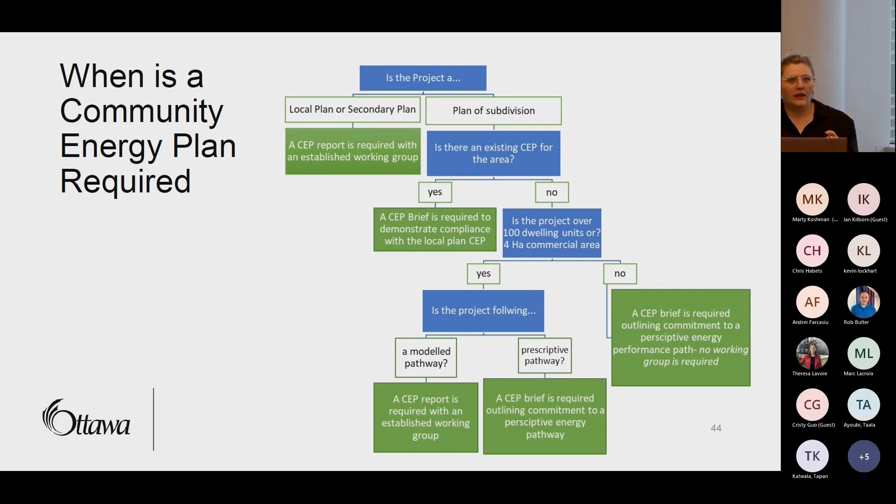Overall, the process for a community energy plan is to assess what the impacts of the development are going to be, propose strategies to mitigate those impacts, put them in the report or brief, and submit for review.

As part of the report or brief, there's a monitor and implementation section where the applicant identifies how they're planning to monitor and implement those targets through to construction. It's not a requirement, but if they're able to, we do encourage monitoring post-construction as well.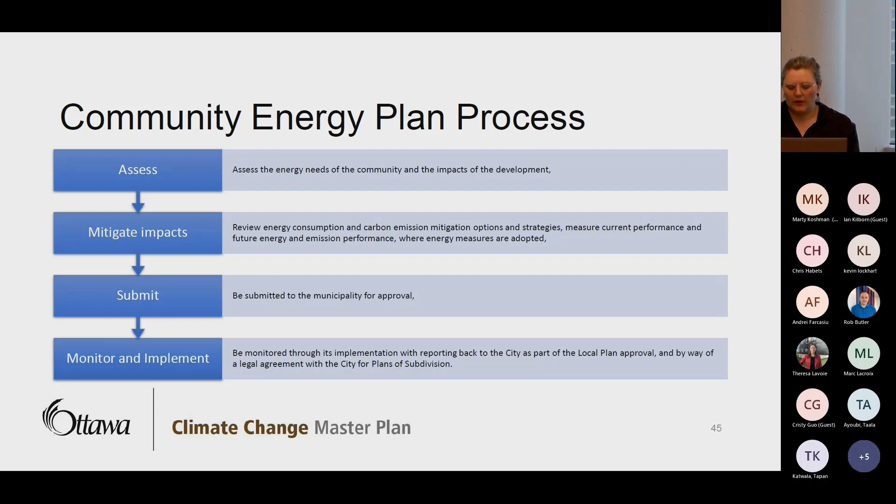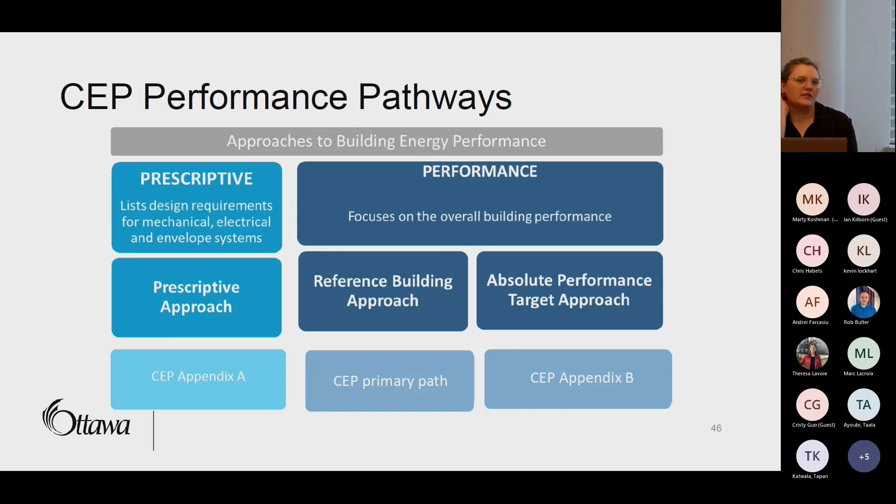So similarly, we have performance or prescriptive pathways, both reference building or absolute targets. This is just referencing the sections of our community energy plan in terms of where these are located.

The terms of reference require that utilities be provided the opportunity to feed into the community energy plan, but we don't have the authority to compel the utilities to participate. They're just required to be provided the opportunity, and if they choose not to participate, the project can still proceed without their participation, working through the potential challenges that creates.

In your engagement with the utilities, were they excited about this? Were they hesitant? How did those conversations go? I would say they're interested in participating and interested in how this may look, but we'll have to see how it starts to roll out, once they start having real demands and asks of them. I know some utilities — it'll depend a little bit on the context, the size of the project, and which utilities they're working with, in terms of their ability to get meaningful engagement on the project.

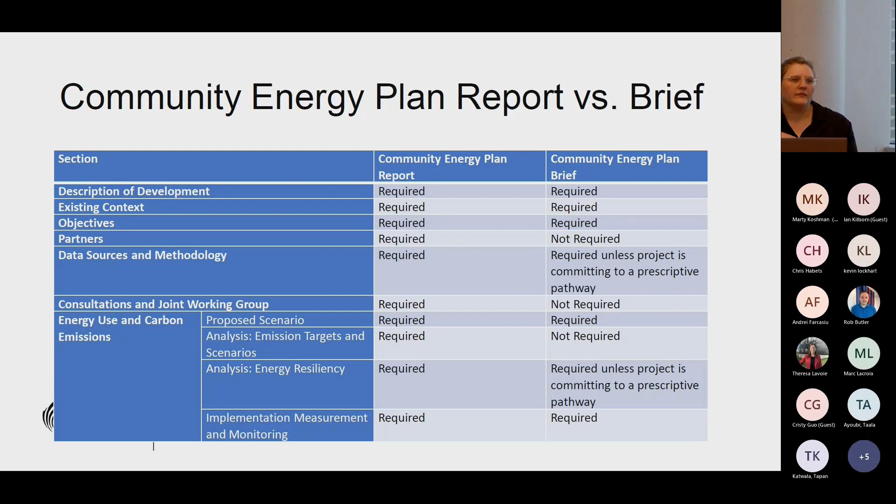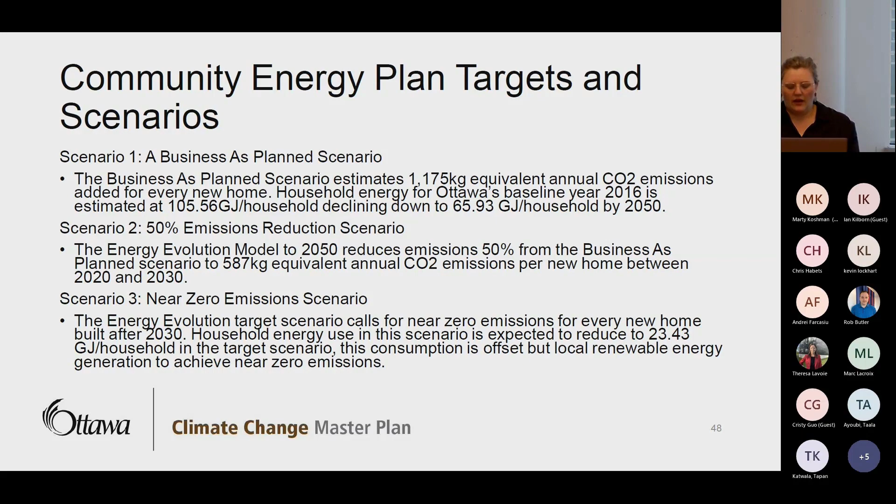From a targets and scenarios perspective, the modeling asks you to look at three scenarios and then identify what the proposed scenario is: a business-as-planned scenario, a 50% emission reduction scenario, and a near zero emission scenario. Those are based on the assumptions in our energy evolution modeling report.

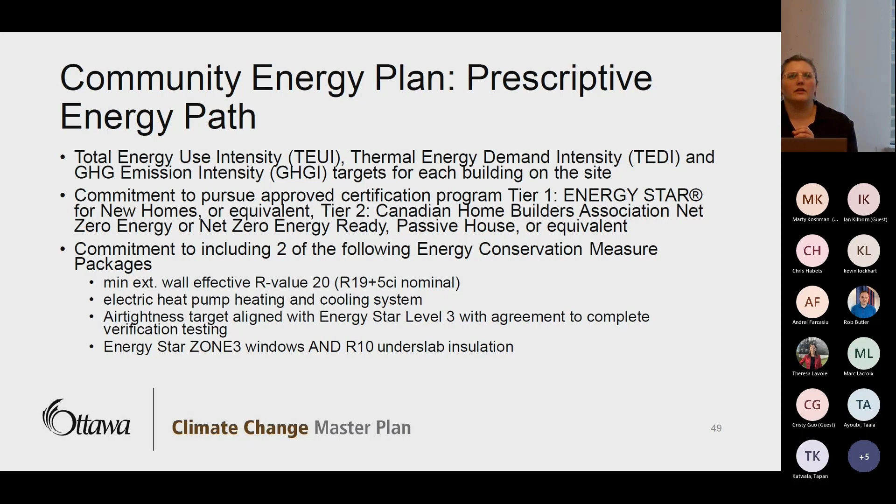The prescriptive pathway can commit to energy use intensity targets for the individual buildings on the site — that's probably going to be more common for a commercial subdivision, since many commercial buildings would have to go through the site plan process anyway after the plan of subdivision, which is where that link-up could come. It could also be a commitment to pursue certification for individual buildings, which will likely have quite a bit of application for plans of subdivision that are primarily residential. You might have a combination of those two if you have partially commercial, partially residential, or a commitment to energy conservation measure packages. Those are the prescriptive options, and that's it.